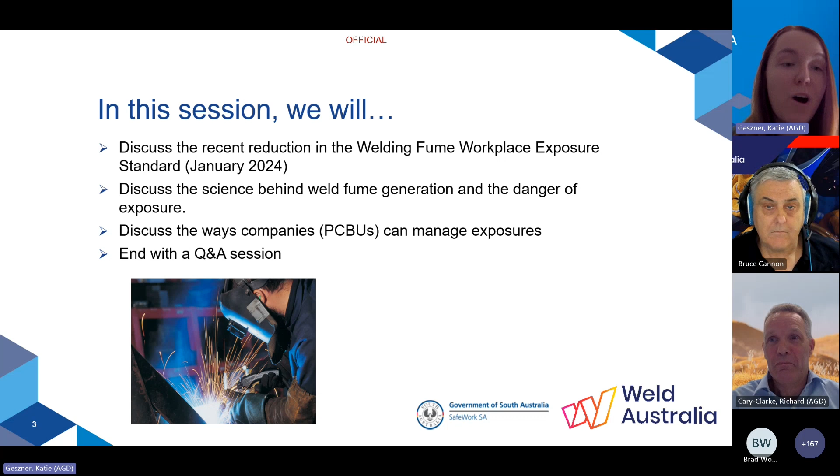Thanks, Katie. For this audience, I probably don't need to explain too much, but to be clear, we're focusing on the high temperature process of joining two or more pieces of metal together. The welding of plastics is not dissimilar, but involves a whole range of different chemicals, and that's outside the scope of today's presentation. We're focusing on metals. The welding process is typically high temperature, and that generates airborne metal vapors or fumes of metal particles. But be aware other chemicals in vapor form could be evolved, for example due to paint, oils, or other dust contamination on the metal surface. Also be aware that welding has a whole range of other hazards, not just chemicals, that I'm going to touch on lightly as we go through the presentation.

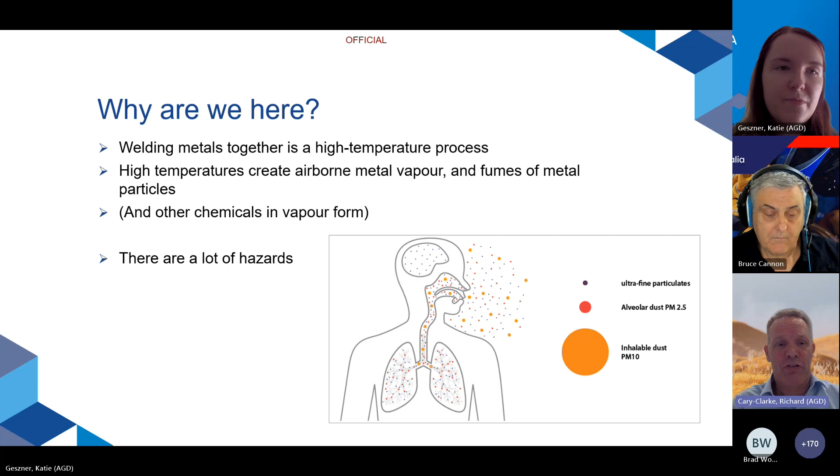Welding fumes were recently classified by the World Health Organization's International Agency for Research on Cancer, known as IARC. The profession was classified as carcinogenic based on human epidemiology studies. IARC does things a little differently—sometimes it classifies chemicals, sometimes it classifies occupations. Here, this pronouncement falls short of identifying the exact causative agent, but clearly there are a number of things in the mix, like nickel, manganese, and hexavalent chromium. Some of those are proven human carcinogens, some are probable human carcinogens.

So I thought I'd try to explore some of the health data available to us in South Australia. Within SafeWork SA, our main source is Return to Work SA, who handle work-related compensation claims. Since about 2015, so not quite 10 years, I could see there were about 800 claims related to jobs that may have involved welding—and I'm being deliberately cautious with my wording there. Less than a handful appeared to make reference to any sort of respiratory illness. Mainly it was things like blunt force injury, sprains, strains, musculoskeletal injuries, and none with cancer.

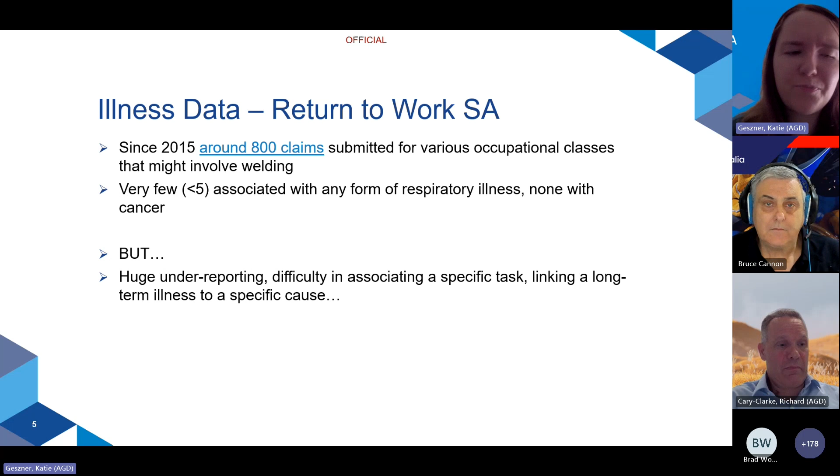Yes, certainly, Katie. In 1997, the then WTIA, which is now Weld Australia, in conjunction with the University of Wollongong and the then Cooperative Research Centre for Materials Welding and Joining, published their fume minimisation guidelines, and I'll show this later on. This work was based on fume measurements taken under still air conditions.

In other words, it's a worst case scenario that demonstrated the particulates are generated at the heat source and are confined to the plume. It is crucial to note, though, that the plume may not be visible to either the welder or, depending on the process, the observer. And aside from the visible fume, the work showed that ozone, which is a lung irritant, is generated by the ultraviolet radiation from the arc well beyond the arc zone, and a level of ozone protection for the welder is required.

More recently, Apex Welding Safety, in a recent independent study, showed that ozone levels will be exceeded in under 10 minutes of arc time, so that's not very long. The study also reported that a disposable P2 respirator impregnated with activated charcoal is only suitable for nuisance levels of ozone and is ineffective at the levels of ozone produced during welding.

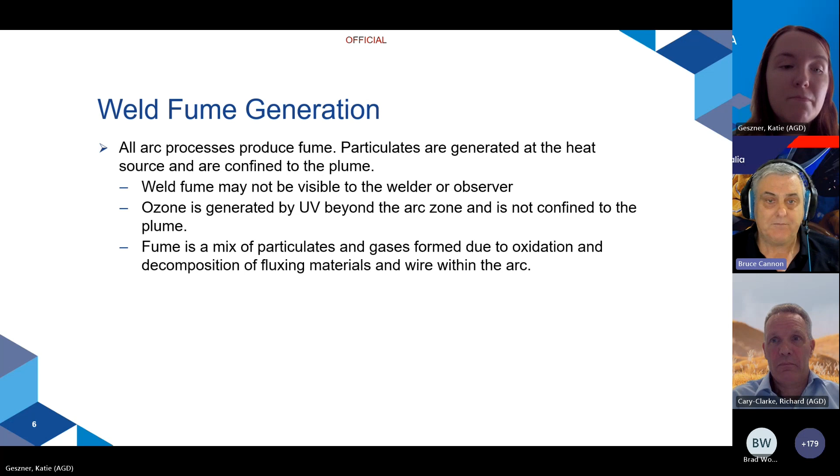They can also be in the nanoparticle range, in other words, smaller than 100 nanometers. At this size, these particles can remain airborne for up to 48 hours. Given the size of human hair, bearded welders will find it difficult to get a P2 mask that fits and seals correctly. It is likely that weld fume will leak into the mask around the edges as the welder breathes.

Be aware that a visible plume is an indication that exposures may not be well controlled in the workplace, particularly if the plume remains suspended in the building where welding is taking place. However, an absence of a visible plume does not indicate a safe level of exposure, depending on the materials and consumables involved. Powered air purifying respirators and air-fed respirator systems provide positive pressure with clean filtered air in the welder's breathing zone, and will therefore reduce the wearer's exposure to weld fume.

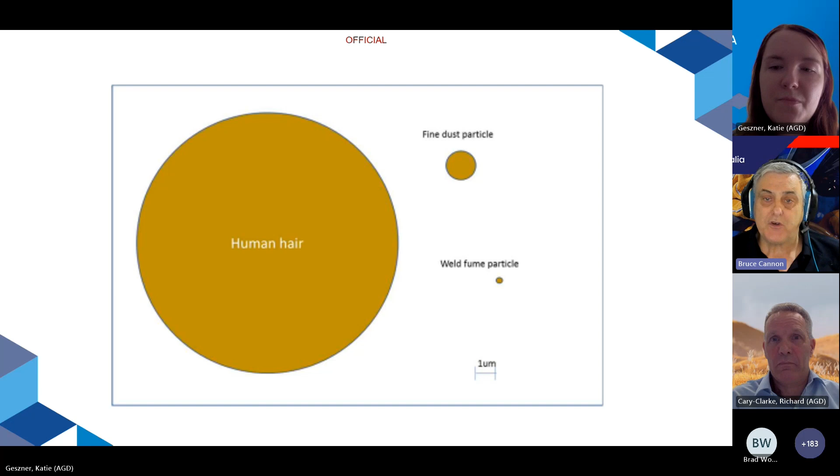Occupational hygienists may refer to larger visible particulates as the inhalable fraction, which can be trapped by the nose and the body's mucus defences, and the fine particulates as the respirable fraction, which I mentioned earlier, because they pass directly through the lungs and then potentially into the bloodstream and around the body.

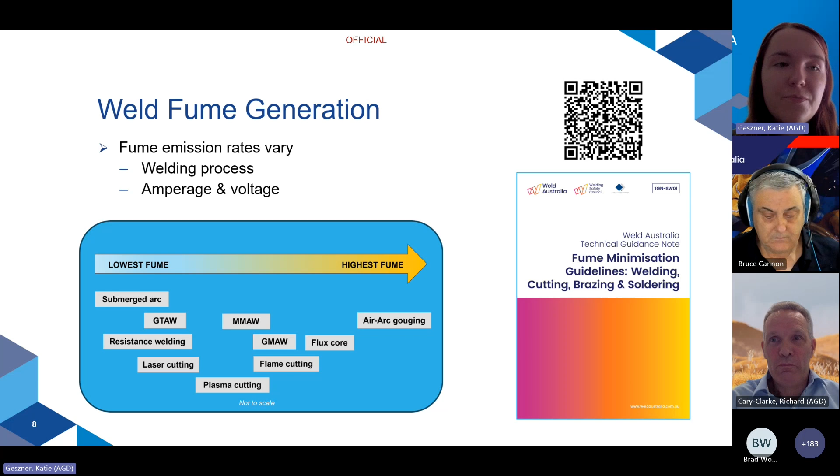Briefly, there are two overarching workplace exposure standards, or WESs: one for welding fume in general, and the other for fume generated when welding aluminium. Numerically, they're both the same. They were 5 milligrams per cubic meter as an 8-hour time-weighted average.

Now the general welding fume standard has been revised to 1 milligram per cubic meter, and there's a proposal generated earlier this year from Safe Work Australia to reduce the aluminium welding fume WES to the same number, 1 milligram per cubic meter. That's not yet in place, but is quite likely to happen towards the end of the year.

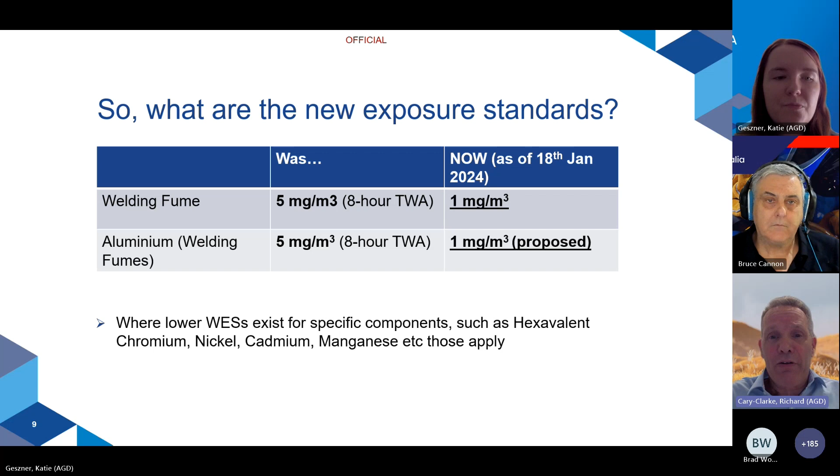However, there's a caveat here: more stringent standards may apply depending on the composition of the fume. For example, if you've got hexavalent chromium, nickel, cadmium or manganese, those lower limits may apply, and I'll talk about those as well.

Also note that from 2026, which is not all that far away, there's a philosophical shift: WESs will become WELs, workplace exposure limits. These are values not to be exceeded, whereas the WES allows for deviations up and down from that mean value.

So if a fabricator is bringing in a hygienist for air monitoring in the here and now, it would be wise to keep your eye on those 2026 values, because they're going to be coming into force fairly soon. So whilst you might be currently compliant, be aware that very soon you may well not be.

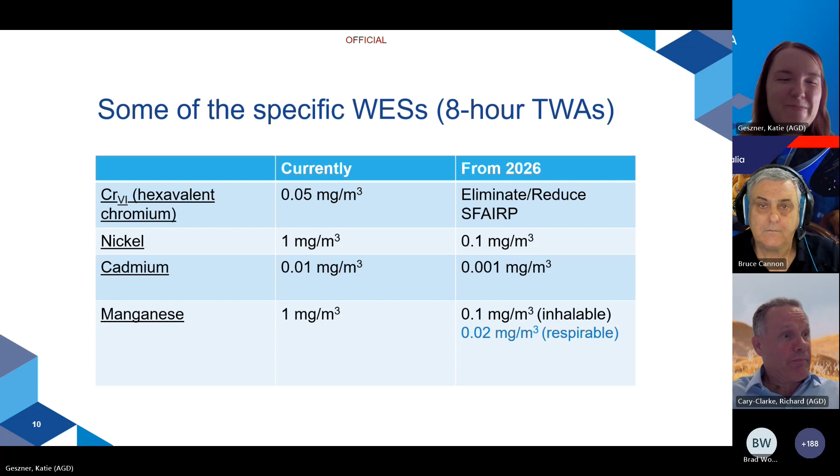I mentioned I would also talk about some of the other hazards, and this slide highlights a few of those. You've got things like ozone, which Bruce has already spoken about, but other things that have cropped up that people might not be aware of, like phosgene.

LPG relates more to the way of generating heat if you're using LPG as the source. Same with acetylene. The process itself might create excess oxygen or a depletion of oxygen, and each has its own particular hazard. Excess oxygen increases the explosion hazard, and oxygen depletion will be problematic for a worker in that environment. Zinc is another metal that is often involved. So that's just a few of the additional chemical hazards.

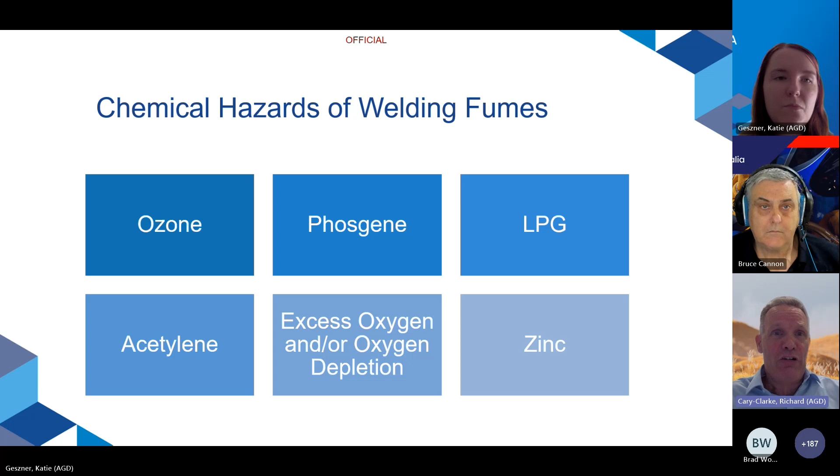There are also a few other things you might need to think about, which Bruce briefly touched on: UV, infrared, electrical shock, electromagnetic fields, the risk of fire and explosion, thermal harm from being near a very hot process, noise because it can be a noisy process, often working in confined spaces, and the risk of falls. All of those need to be involved in your risk assessment process.

Thank you, Richard, for all of that. Just before we continue—oh, no worries.

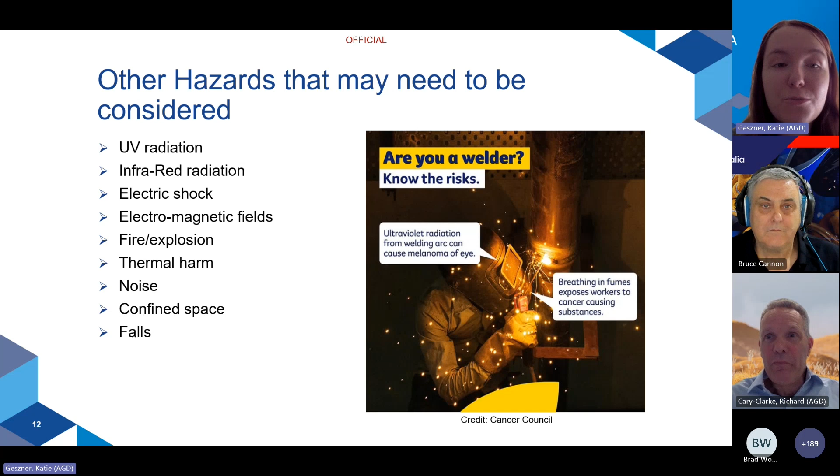This next question is for both of you: what are the risks associated with exposure to weld fumes? Okay, Bruce and I are tag teaming on this slide.

So yeah, there's current emphasis on the potential carcinogenicity of weld fume, but we mustn't forget that there are quite a number of other serious health consequences associated with weld fumes that might actually be far more likely to incapacitate welders. Yeah, that's right, Richard.

Firstly, let's look at short-term effects, and the most common one that's well known is metal fume fever, which arises due to excess exposure to zinc fumes and fumes from other metals that can induce flu-like symptoms in the exposed person. Recent research in mice indicates that metal fume fever may arise in susceptible individuals due to an allergy response to the contaminant in the fume. Once the individual is removed from the exposure, symptoms will pass after a few days rest. But please note that contrary to popular belief, consuming a carton of milk will not prevent nor cure metal fume fever.

There are also serious long-term health conditions that might affect welders exposed to excess fume, including lung diseases such as COPD, pneumonia, bronchitis, occupational asthma, or respiratory sensitization. Welders are more likely to be afflicted by those than lung cancer.

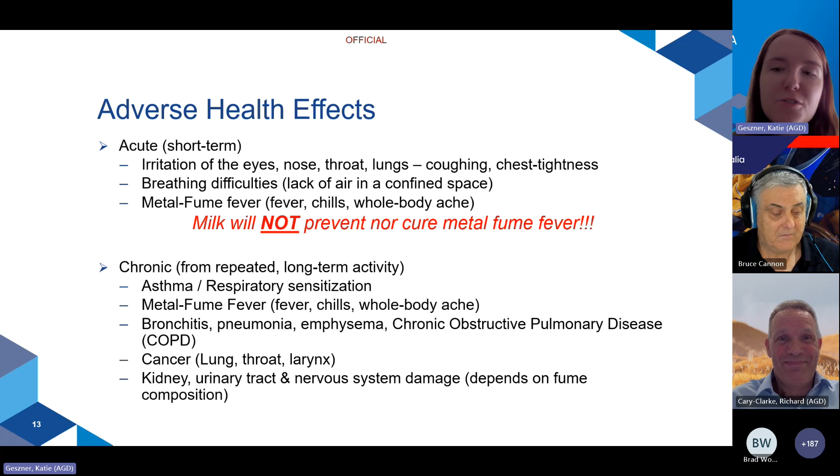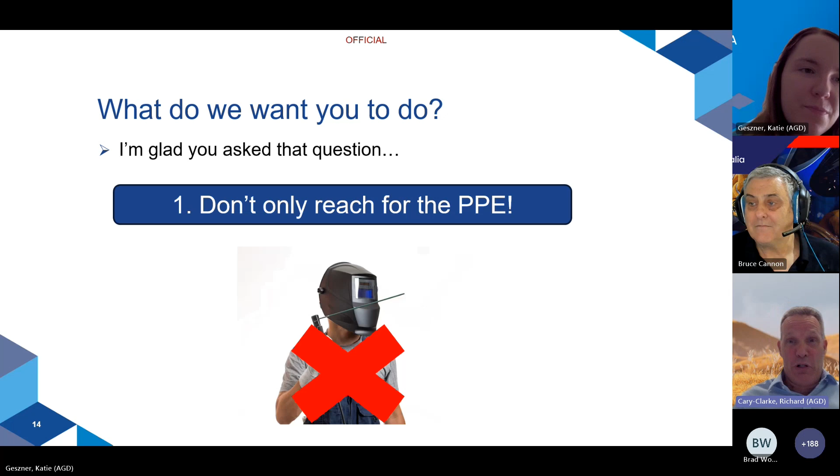Thanks, guys. So Richard, the question that's probably on everyone's minds today: what controls can PCBUs put into place to manage the risk of exposure to weld fumes? Yeah, I'm glad you asked me that question. First and foremost, don't just reach for the PPE. We would like you to think a bit more intelligently and apply the classic hierarchy of controls.

So this is a very familiar diagram, the risk controls hierarchy. We expect PCBUs, businesses, to be able to demonstrate that they've gone through that higher level thinking before reaching for the catalogue and ordering the PPE. So for arc welding, opportunities might be a bit limited, and sometimes the only option available might be to actually introduce PPE. But having said that, substitution and engineering control options do exist, and we expect those options to have been considered before moving to PPE.

In the event of a visit from your local Safe Work SA inspector, an absence of engineering controls in the workplace will no doubt raise some doubts in their mind, and they're going to be looking for evidence of the verification of controls, some air monitoring by an occupational hygienist.

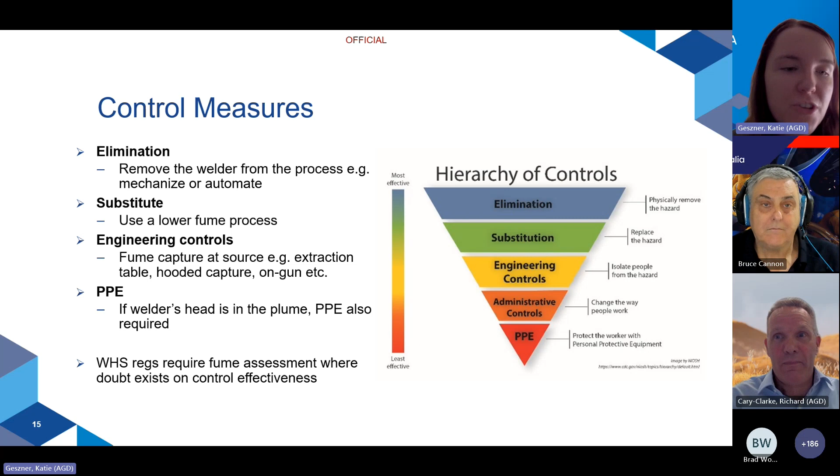Yeah, perfect. Thanks, Richard. So Bruce, can you give us some practical examples of the control measures using the hierarchy? Certainly. Well, the first one is the most obvious one, but it's not always possible, and that is remove the welder from the arc source. That effectively reduces the risk of exposure to the welder.

Now, options here include the use of the submerged arc welding process where feasible, or you can mount the welding torch on a buggy or travel carriage. I have actually used a flux cored arc welding torch mounted in such a system, complete with flexible extractor tubing mounted on the tractor. It's not always feasible, but it is very effective.

Another option that has become evident in recent years is the use of cobots. Cobots are small robots designed to work in close proximity to people. They are easily mounted on a mobile workbench and can be readily moved to the workpiece. I am aware of one cobot being used, for example, inside a dragline tub in a Queensland coal mine.

The use of processes that produce reduced rates of fume may also be a viable option. For example, gas metal arc welding, or MIG welding, with a solid wire produces about a third of the amount of fume typically generated when a flux cored consumable is used. For welders using non-waveform controlled, conventional power sources, fume minimization is possible by ensuring a qualified weld procedure that maximizes arc stability is followed. Furthermore, the use of an inverter-based power source also enhances process stability. Lastly, the use of copper-free welding wires, for gas metal arc and flux cored, further reduces weld fume generation.

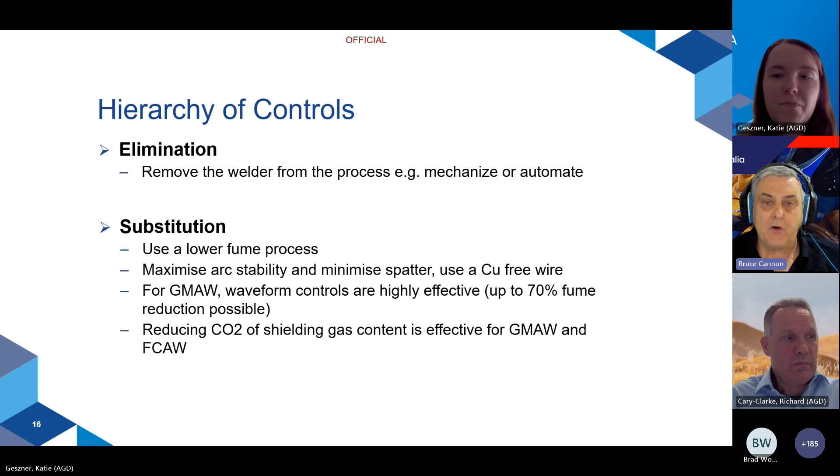Further reduction in fume generation is possible by reducing the carbon dioxide content of the shielding gas where that is technically feasible. Evidence is now emerging that a similar reduction in fume also occurs with lower CO2 shielding gas used on flux cored wires. For users of the flux cored process, wires are available classified for use with argon with 10% CO2 shielding gas that minimize weld fume in a manner similar to gas metal arc. In the USA, classification of flux cored wires commonly uses a 75-25 argon CO2 mix, whereas in Europe they've transitioned more to an 80-20 or 82-18 mix. Now a 90-10 mix is emerging due to the need to minimize fume.

It has also been established that the level of carbon dioxide in the shielding gas has a significant impact on the amount of fume emitted. Reducing the CO2 content from 18 to 10% can nearly halve the level of fume generated. Be aware though that reducing the CO2 content of the shielding gas may not be feasible from a technical perspective, as it may adversely affect the weld metal properties and classification of the welding consumable. That said, consumable manufacturers are currently extending the classification range to include the argon 10% CO2, or M20, mixes.

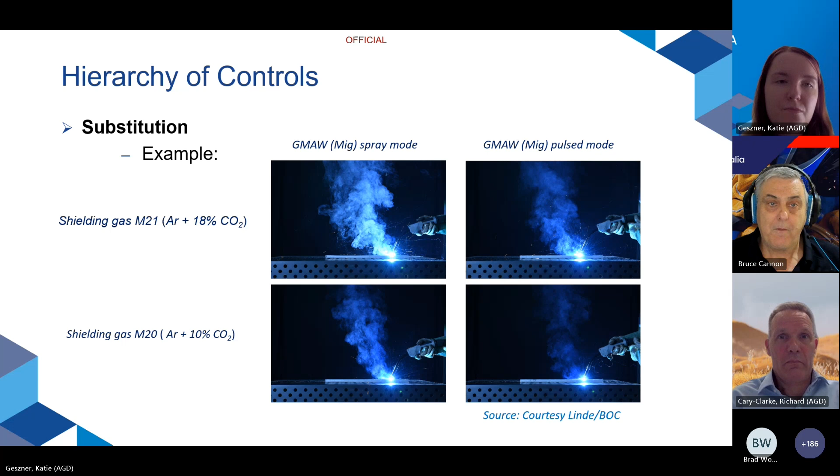For fume control, regulatory authorities typically expect fume to be captured at the source when generated. This can be via hooded capture devices or on-gun extraction systems. Efficiency of capture varies, but can be up to 90% effective for most fume constituents. Be aware, though, that it is ineffective against protection from ozone, as ozone is typically generated away from the arc due to the action of ultraviolet radiation on atmospheric oxygen. Fume capture is essential, not just to protect the welder, but to protect those working nearby. Similarly, good general workshop ventilation is also a must to protect those also working nearby.

Importantly, if fume generation can be minimized, there will be less fume to capture, and therefore the engineering controls will be much more effective. If the welder's head is in the plume, fume capture alone will be insufficient to protect the welder, given the 1 milligram per cubic metre time-weighted average limit, and additional fume controls will be required. As previously stated, if there is a lack of engineering controls in use, it is likely that a regulator will require a formal fume assessment to be performed. However, real-time fume monitors are now available to assist fabricators to demonstrate compliance for those working nearby welding operations.

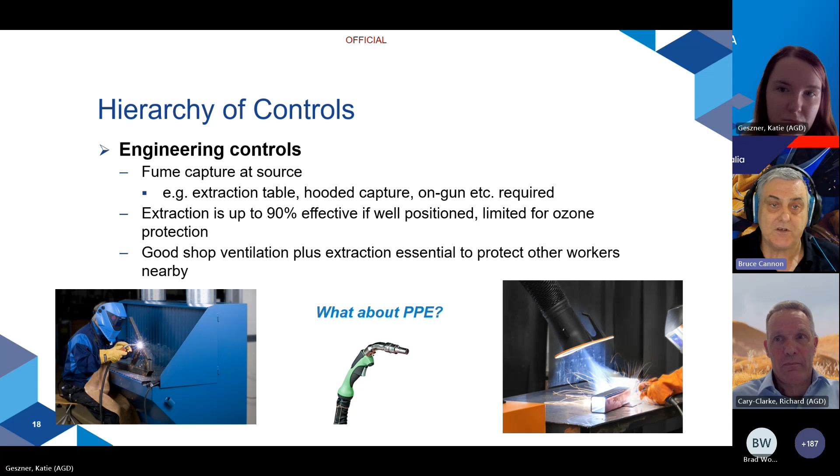Now, as previously indicated, if the welder's head is in the plume, it is known that fume capture alone will be insufficient to protect the welder given the 1 milligram limit. Other issues for consideration include, but are not limited to, limited joint access, weld position, and emission of hazardous particulates with low exposure limits. Whilst fume capture is essential, personal respiratory protection is also recommended, and powered air purifying respirators are known to be especially effective.

A well-maintained PAPR unit provides good positive pressure of filtered air in the welder's breathing zone, where in excess of 99.5% of weld fume can be removed or prevented from coming into the breathing zone. Now, because ozone is generated remote from the arc due to the action of the ultraviolet radiation on the atmosphere, local capture devices are at best only 50% effective at capturing ozone, and additional control is required to minimize the welder's exposure levels.

PAPRs can be highly effective at eliminating the welder's exposure to ozone, primarily because they draw air from behind the welder, where there is usually a low incidence or absence of ultraviolet, and therefore ozone behind the welder. If necessary, an A1 filter can also be added to the PAPR's filter pack to remove ozone should it be required. But that's not the end of the PPE story.

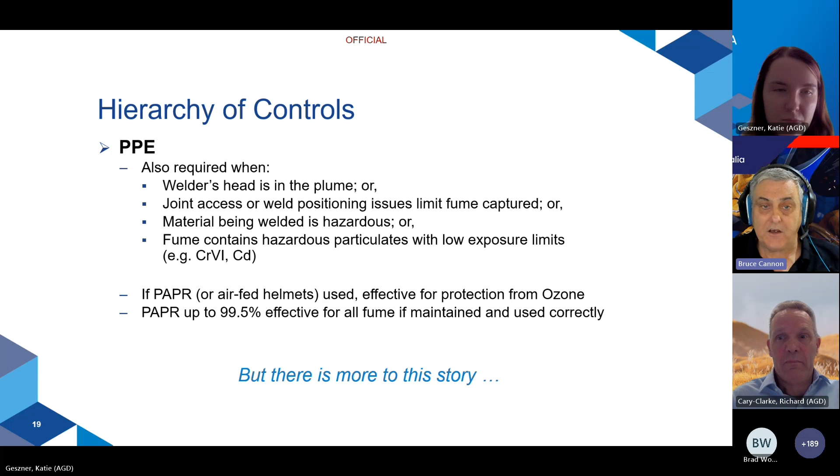Now, why can't PCBUs just use a PAPR? Well, as you may realise, a welder wearing a PAPR is the only person protected during welding, and they are only protected whilst the face shield is lowered. Once it is raised, the welder, just like anyone else working nearby, will be exposed to the weld fume unless engineering controls and good ventilation are in place. Therefore, a combination of controls is usually essential.

As previously stated, if there's a lack of engineering controls in use, it is likely that a regulator will require a formal air monitoring assessment to be performed. Portable real-time fume monitors, which I will show shortly, are now available to assist fabricators to demonstrate compliance for those working nearby welding operations.

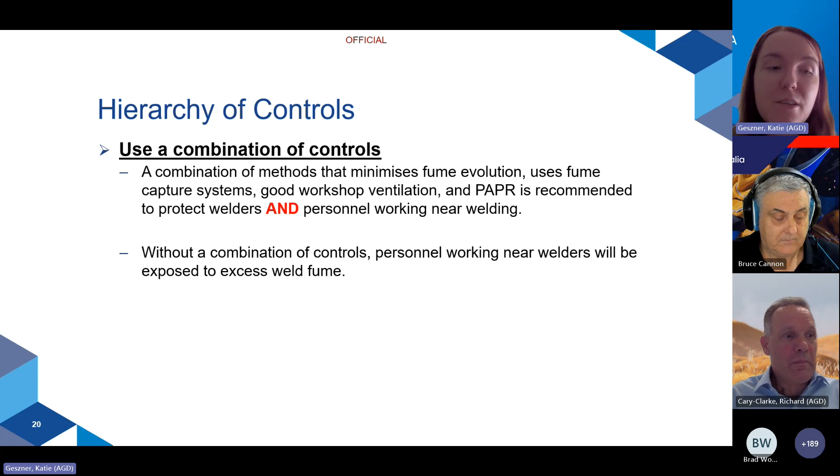Thank you for that, Bruce. That was really, really in-depth and some really good ideas there of how businesses can manage the risk. So Bruce mentioned air monitoring and air assessment. So Richard, from the regulator's perspective, is there a requirement for PCBUs to conduct air monitoring? Well, yes.

Compliance with the WESs will require measurements to be conducted in the breathing zone, and so there are some guidance documents here. There's Safe Work Australia's guidance document there. Yeah, and it's quite clear that in order to demonstrate compliance with a WES, you're talking about measurement within the worker's breathing zone. And as Bruce was demonstrating earlier, particle size does matter because it affects the way that the substance impacts on the respiratory system, and therefore it might affect the particular target tissue or disease outcome.

But I would say that in practice, determining particle size can be quite a difficult thing to do. And well, maybe in some senses it becomes a bit of an academic argument in terms of compliance with the numerical value of the WES. But as I say, it does matter because it affects distribution and it affects disease outcome.

So yeah, here's a very simple schematic that shows you've got a sampler there that's in the breathing zone. Now, again, just referring back to Safe Work Australia's guidance document, to be clear, the breathing zone is a 30 centimetre diameter, essentially around the head. So it can be measured behind the head, and that might well be important in terms of practicability in determining personal monitoring values.

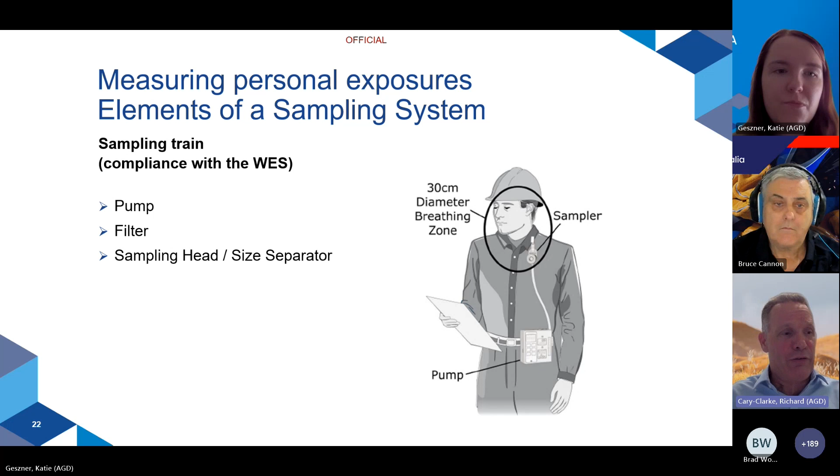In addition to compliance with an airborne standard, there might be some requirements for health monitoring. So Regulation 368 cross-refers to a list of chemicals in what's known as Schedule 14, and that list includes things like lead and cadmium and chromium. Schedule 14 is identifying what needs to be done as a minimum, but also within Reg 368, there is scope for conducting health monitoring essentially on any hazardous substance, providing that there is a valid measurement technique. And the clause that's currently there is if there is a significant risk to health.

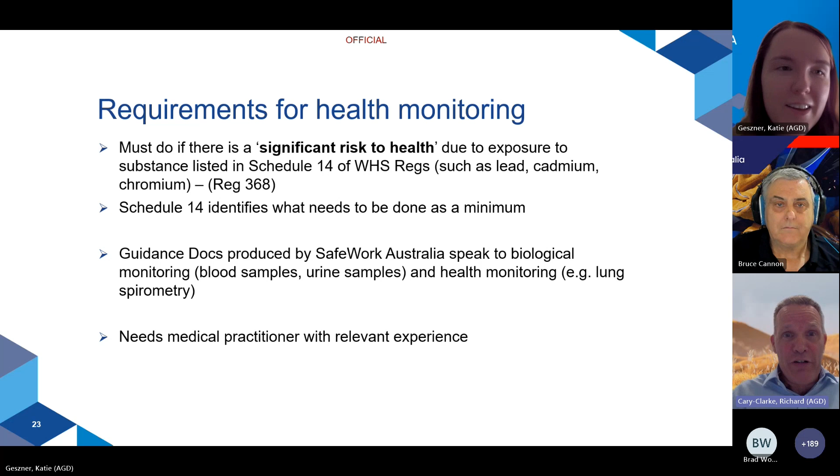And well, significant risk. Yes, yes. What do the regs mean by significant risk? It's a bit of a vague term, as you can tell. Yes. And all I can say is that Safe Work Australia is currently producing some discussion papers on this topic and thrashing this out amongst the states and territories, which sort of leads me to this as a starting point.

What's been pieced together here? This has been plucked from the current regulations related to respirable crystalline silica, and there's a bit there that refers to, well, typically half of the workplace exposure standard. That's sort of used by occupational hygienists as an action level. That's often an indicator that a work site's control measure systems might have gone awry.

So significant risk, I'm throwing it out there, you know, in terms of consistency with silica regs, well, maybe half of the WES is what is a trigger for significant risk. And Bruce is going to talk about some of the other tools that might be useful for checking significant risk.

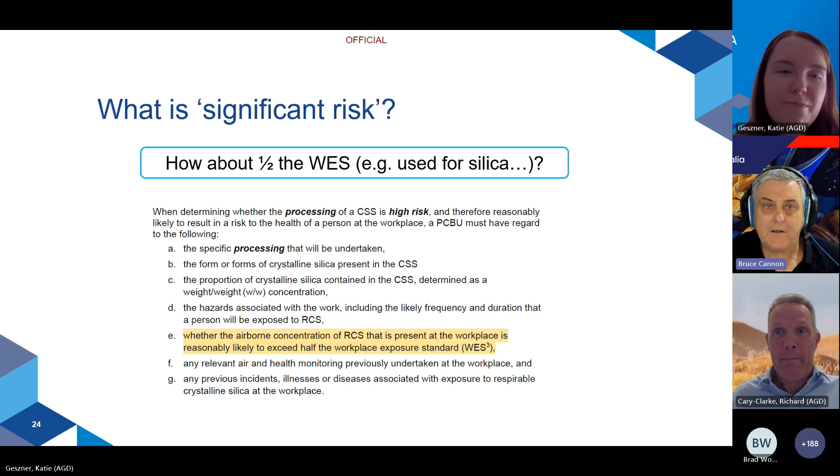Importantly, though, with these units, please be aware that they are a useful tool to provide workplace guidance on general dust and fume levels, but they are not a substitute for air monitoring performed by a hygienist.

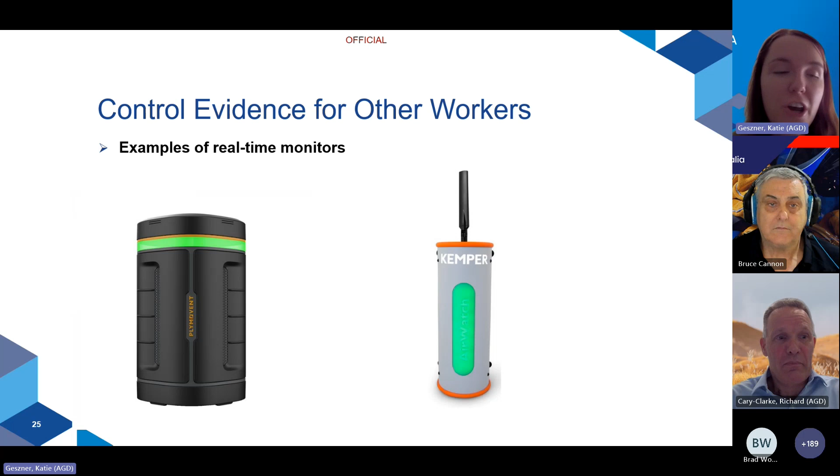Cool. Thanks for that, Richard and Bruce. So, Bruce, if PCBUs want some more information about managing exposure, some more detail, where can they go? Well, they can go to Weld Australia's fume minimisation guidelines, and they can be downloaded free of charge via the resources tab on the Weld Australia website. And this guideline contains an audit prompt sheet for weld fume in the appendix. Further guidance is also available from Weld Australia's Technical Note 7, Health and Safety in Welding.

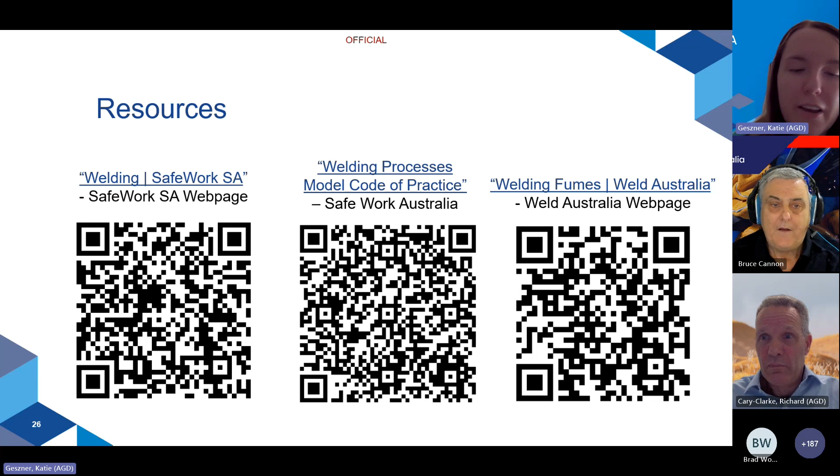And on your slide, you can see 3 QR codes there that will take you directly to a number of resources available. Weld Australia has set up a specific web page on the fumes that we put up very quickly after the surprise announcement back in January last year about the sudden change. And there's the SafeWork SA webpage, and also the Code of Practice as well from Safe Work Australia. So yeah, different resources there.